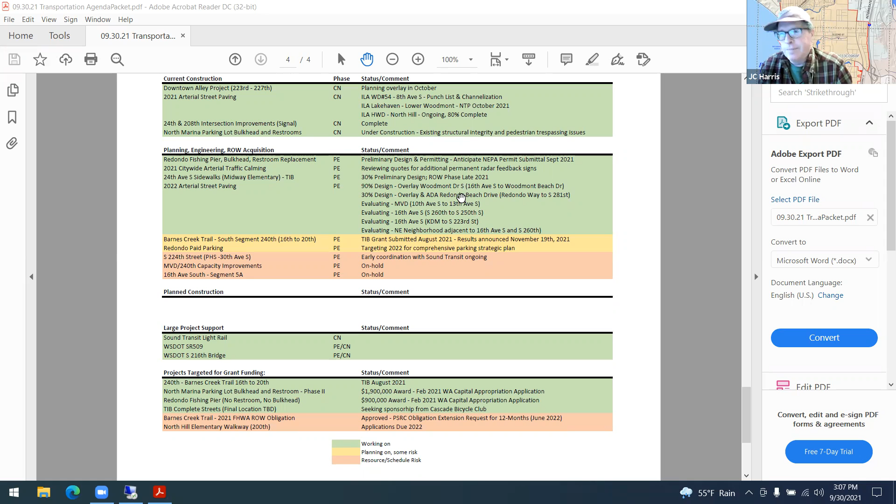No, I'm not, I'm just. My wife got a light pole near our house years ago in Burien, and I was just struck by there were 6 agencies involved in just a light pole, and it took forever. Only 6? Yeah, it must have been a slow week. So I'm always just struck by how one can predict or plan any kind of construction cycle. Anyway, go on, sorry.

Sure. The next block of projects are from our 2021 arterial street paving program. So the interlocal agreement with Water District 54 to rebuild 8th as they did their water main, pavement went down, the speed bumps went down, and now we're just on a punch list fixing a few things out there with the contractor. That project is wrapping up very nicely. The interlocal with Lakehaven for Lower Woodmont, they just gave the contractor notice to proceed.

They'll be working through this winter and into next year on water main replacements as well as paving, so I don't expect to see any new paving down there till early next year. The interlocal agreement with Highline Water District for all the North Hill work, they're about 80% complete, so there will be more water main installs and more streets getting paved up there. They're trying to get all that done by the end of October, but we'll see how that pans out with weather.

Thanks for that update. I had a few people reach out to me, I think in the 20%, because they'd said they loved how everything got paved and done, but their area still sounded like it was in process. I know Highline Water District told me they had a couple emergency main breaks they had to take care of and reshuffle resources, so they're a little behind schedule on finishing up their North Hill work, but it's getting there and looking pretty good.

The next project, the signal at 24th and 208th, is complete and closed out. The North Marina Bulkhead project, as everybody's probably aware, we're under construction down there now. Still getting to know the contractor and the site, but it's coming together. We've got some existing conditions that are pretty challenging to deal with, but we're working through it. We've also had some pedestrian trespassing issues with folks opening the gates and walking through the site, so in the future I might get a little more strict on public access if we keep seeing safety problems down there. But so far it's going pretty good. The restroom was demoed this past week, and I believe today they should be starting to drive piles for the breakwater out there. So a lot of work going on and a lot more upcoming on that project.

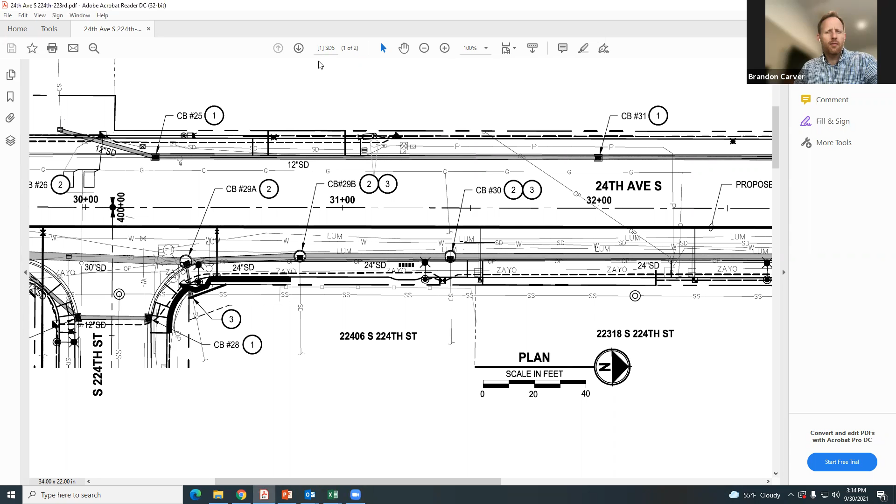However, we're running into some major utility conflicts that could potentially delay the project schedule a little bit. So I would like to share my screen here. Can everyone see my screen? Yes. So this is a snapshot of a preliminary design plan of the project for the section from 224 and 223rd. I want to demonstrate how much existing utility we have on the project that we are dealing with, and the location of those utilities compared to the proposed improvement on the project.

One of the major conflicts we're running into is with Lumen. You can see these two lines right here representing their existing duct bank running from in between 224 and 223rd on the east side of the project, and they are in direct conflict with our proposed storm line. Lumen told us that their facility provides local and national service to a vast range of customers, including the FAA headquarters and the airport. So they expressed concern that relocating those facilities would be really extensive in time and effort for design and construction, and that could potentially impact our project's schedule as well.

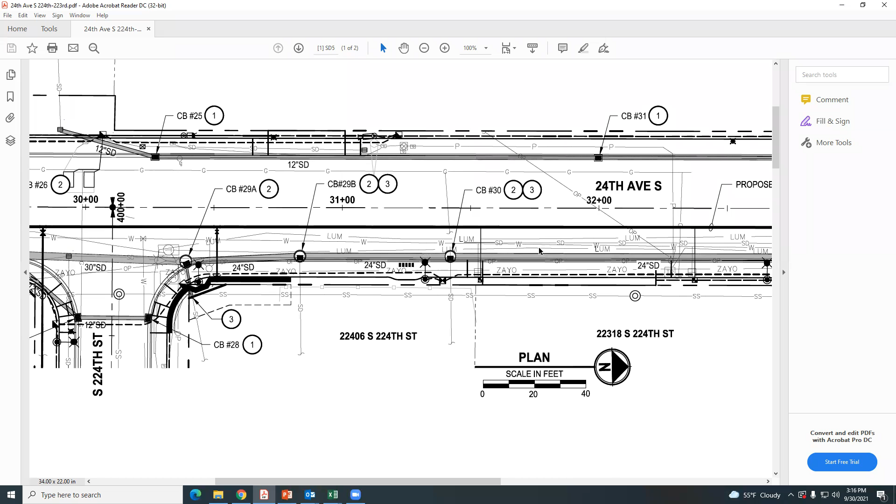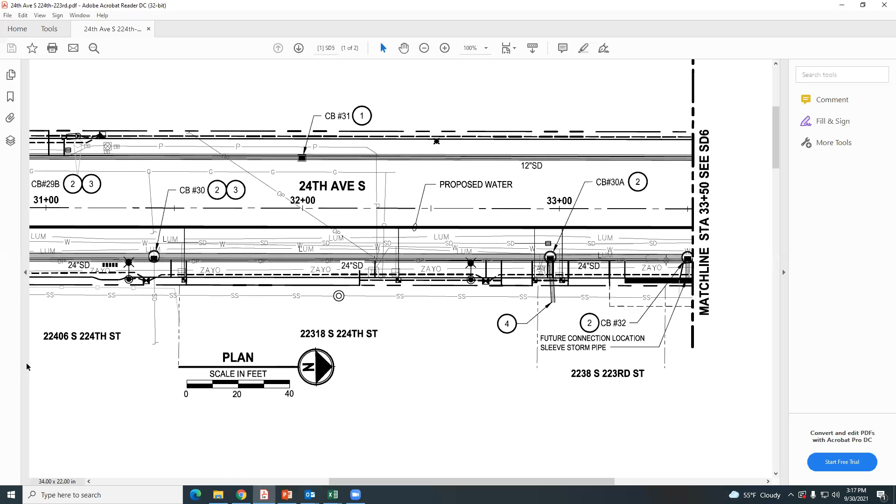That water main is also in conflict with our storm water, and Highline is working with Parametrix - a different team - to come up with a design to relocate their water main, and we will enter an interlocal agreement with them to do the construction for their facility. That's all I have.

Thanks Kai, you showed a great plan there. I think the theme of the story in general, especially with Lumen, is their facilities are very major - their duct banks are probably like 3 feet by 4 feet blocks of concrete. They've got two of them at different elevations, and it's making us redesign and drop our storm drain line down very deep, to a mark of like 15 feet deep. So there's a lot of significant challenges on trying to get our proposed large storm drain in the street.

The redesign is probably more beneficial to the project than waiting for Lumen to move or adjust their facilities. So we're going through that process of figuring out what an agreement looks like where Lumen will compensate the city for that type of redesign and work moving forward. We'll have more on that coming up, but that's a good intro on the project's challenges and a couple of the delays - what they're caused by, with utilities being the big ones. Very challenging projects.

So Brandon, do you think we'll be able to pass the cost off to them, or a cost share? Do you have any idea how much more that's going to make the project cost, and also how much longer it's going to be delayed?

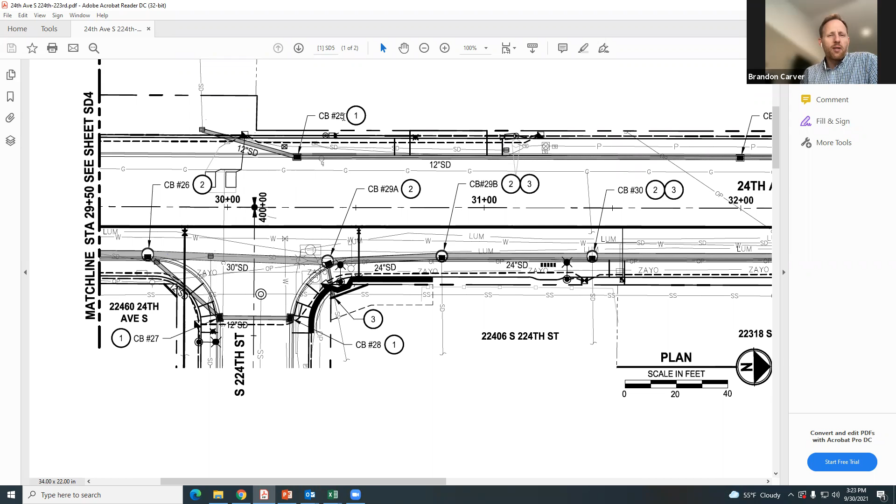Yeah. Well, the one thing is, not only will it make 24th nicer, but the biggest reason is the safe routes to school. So it's worth it, whatever you need to do. Yeah, it's worth it for our kids to get to school safely. Yeah, you bet. This is still a great project, we're putting a lot of effort into it.

From a schedule perspective, outside of just the design challenges, we are still working with our grant partner TIB on trying to get the right-of-way acquisition phase advanced here, so we can get that moving shortly in the next month or two, as well as—pending this utility conflict—we're still going to try to take the rest of the design to final design with anticipation to still try to go to ad early next year. So we're still going to do everything we can to hit the mark in the first or second quarter next year, but we just wanted to bring up some of these higher risk challenges we've got to work through here. Thank you.

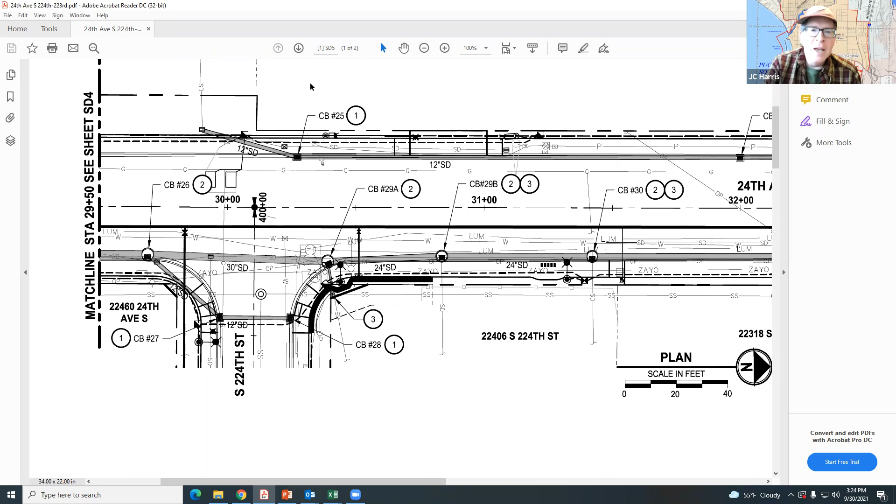So my next question, going back to that light pole I mentioned—it was the case back then that apparently there was very poor mapping of utility lines in Burien, and it was very common that they would find undiscovered different stuff from like post World War II and so on. How often is it that you run into where you find unexpected infrastructure from different providers? Is it all fairly well mapped out at this point, or is that still an ongoing thing?

Yeah, no, go ahead, try Kai to provide an answer to this question.

So we work with all of the utility companies trying our best to map out the existing infrastructure out there, but it's all based on their as-built records, and some of those records are dated like 20, 30 years back in the day. So another effort we're trying to do is asking utilities to actually go out there and do potholing, so they could provide more accurate horizontal and vertical information. But that's also a very lengthy process, as coordination with utilities is challenging.

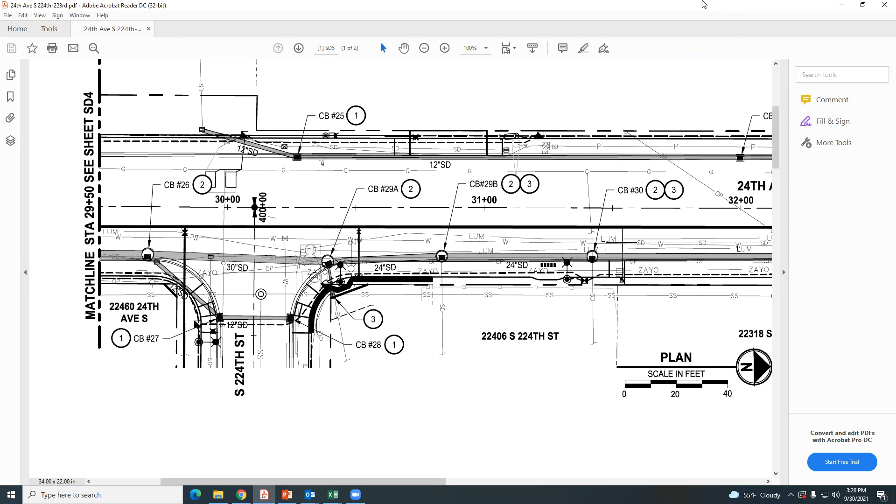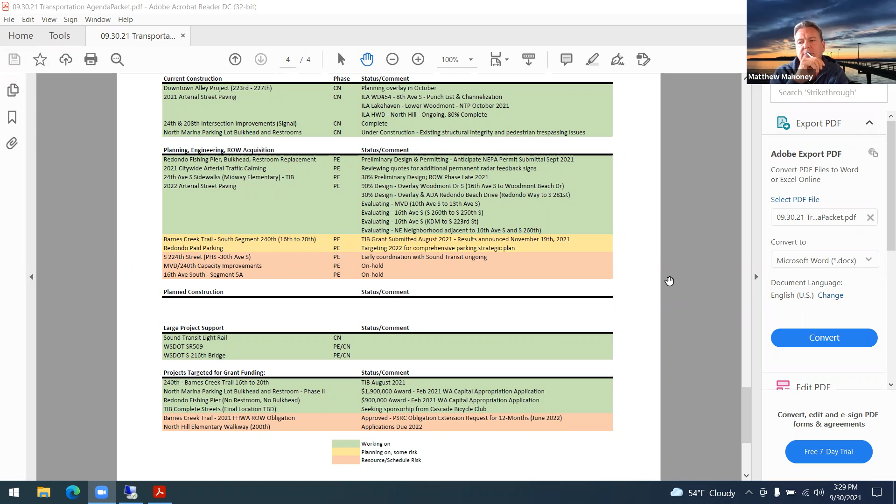Just so the North Hill Elementary walkway, you're working on that to apply in 2022 for what, 2023, 24? Yeah, the next target cycle. The next cycle for the Safe Routes to School project applications is 2022. So I'll be focusing on that next year when WSDOT publishes their requests for applications. But yeah, that's definitely high on my radar, and I'm still trying to seek other funding that may help move that project forward. That's just a great corridor to keep moving on.

Yes, Andrew, put that on your list for you, me, and Brandon to chat about next week sometime. Sure.

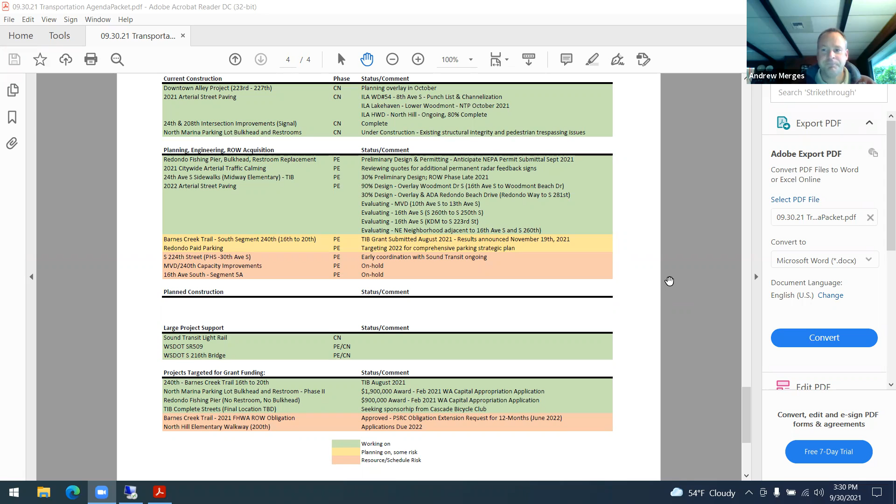All right, that's all I had. Councilmember Harris, did you have any more questions on this? Always, but not right now. Okay, well, that's all we had on the agenda today.

I was just going to say, we'll put a note out with Bonnie that there is a ribbon cutting. We were a partner with SeaTac on the Des Moines Memorial Drive 200th signal, which ties into this walkway we'd love to see on 200th. But that's a week from today, right? I believe that's a week from today, on the 7th.

Deputy Mayor Mahoney, do you feel like you've got everything you need for that? Yes, I'll be there. Thank you for the notes, Andrew. No problem. Since we have a few minutes, just some other miscellaneous things.

We think that the girders for the Sound Transit Guideway will be placed over Kent Des Moines Road sometime within the next 2 months, likely in November. So there'll be some nighttime closures while they install those girders over the road. That'll begin to change some of the landscaping up there.

The noise walls are going in, making really good progress. The 216th Bridge Reconstruction turned out really well. The work Kiewit did for us, pretty amazing the amount of work they did in 5 weeks. Really remarkable work there. Overall, that project's going pretty well. We've got a few disputes, as with any project, we're working through, so hopefully we'll get some of that resolved with them.